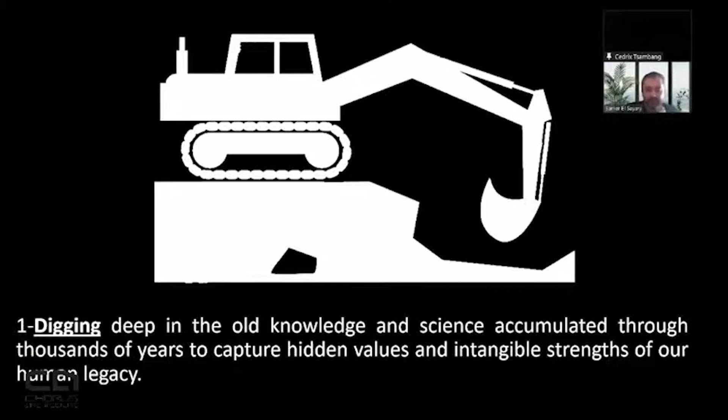Let me introduce my design manifesto, which I have developed over the last 20 years. First principle: digging deep into the old knowledge and science accumulated through thousands of years to capture hidden values and intangible strengths of our human legacy.

My second principle is developing those values and strengths using cutting-edge technologies to create state-of-the-art design that carries the spirit of the past, not in shape or form, but in existence. And of course, the last thing is documenting, publishing, and presenting those experiments to deliver them to the future generation.

I'll be presenting a set of projects. All of these projects are based on either existing technologies or near-future technologies.

We live here today. We have our biosphere that really carries us, enriches us. It provides us with nutrition, with oxygen, with everything that we are blessed with living in this place. But will this place be the same in the near future?

This is the most important and challenging question that we have to ask, and unfortunately maybe our future grandsons and future generations will have to answer it. Scientists have divided the existential risks, the mass extinction level events that might threaten our race and human existence, into 16 different divisions.

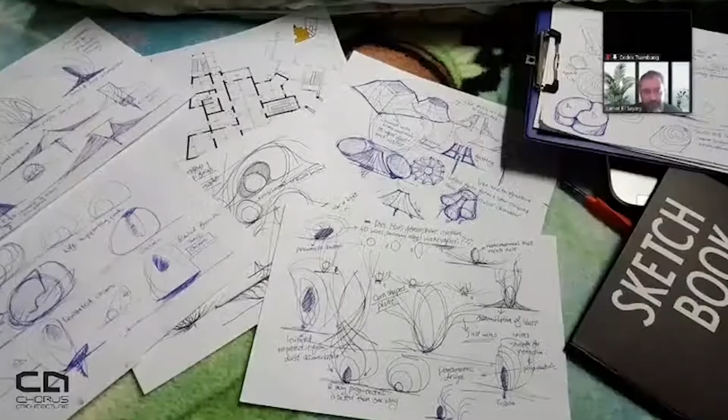And now the time for design. These are a set of projects; I'll be presenting 3 or 4 of them, but I always like to present their icons.

Let's first begin with my last project, presented this last summer, just 2 months ago. It was awarded, by the way. All of the projects presented today are internationally awarded projects, and this is merely something I would like to present.

It is a research project, so these are not only architectural projects. There is an architectural design inside this project, but the other part is a science paper that is produced and presented to different conferences and journals.

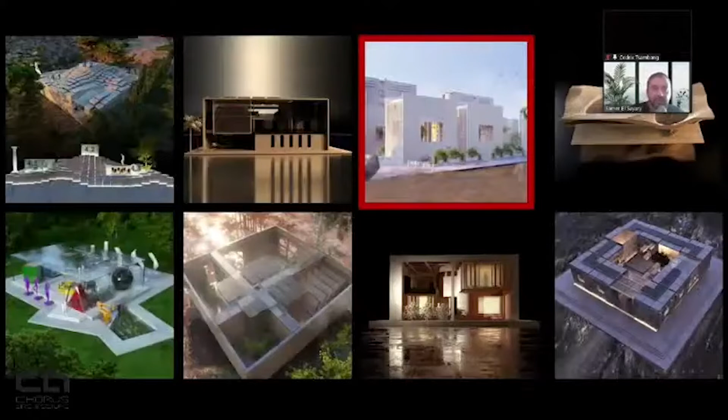So, Fina House - it is a kind of house. Fina in Arabic means the window or the courtyard, so it might also be called the courtyard, vertical courtyard house, or the window house. This project has a minimalistic view, and it was actually inspired by the Apple design code. There's a very interesting book that I started by reading.

It's called Designed by Apple in California. This book really describes the design code and the minimalistic approach, and how you can minimalize every single detail in your design.

But to reach this kind of simplicity, which was discussed and argued since the Renaissance era, even by Leonardo da Vinci in his famous quote, 'Simplicity is the ultimate sophistication,' doesn't mean that this is really a simple design. It means this is an ultra sophisticated design to reach this kind of minimalism.

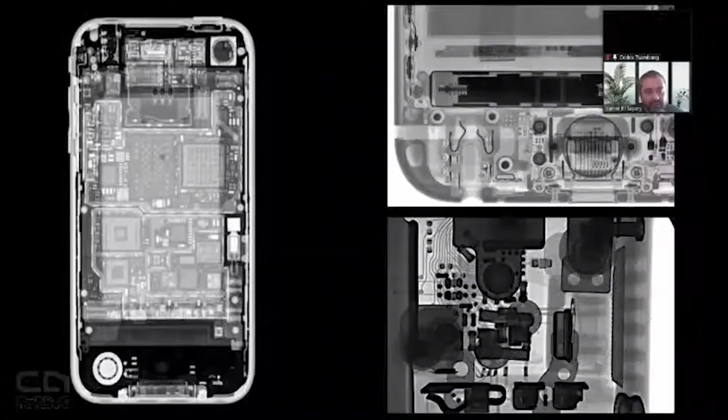So this outer shell that is really simple and minimalistic carries inside it the most sophisticated engineering design, developed using a lot of experts and teams, and maybe costing a lot of time, money and effort. This is one of the lessons we have learned from industrial design.

The same applies for this house. As it seems, it is minimalistic, it is so simple, it doesn't carry a lot of details as shown, but it was developed using 50 design criteria.

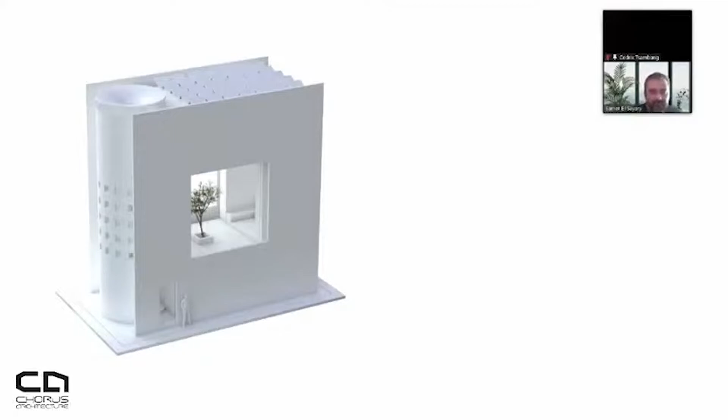Literally, 50 design criteria were developed and tested inside this house, categorized into developing our legacy, social core values, environmental agenda, clean water, economic sustainability, energy agenda, food production, urban regeneration, aesthetic value, physical and psychological well-being, flexibility, adaptability, zero waste, and biodiversity.

So these are the set of criteria that were developed, not only for this project but over the last 20 years, and were applied, all of them, inside the latest project. So this is about strategic thinking.

It is defined as a mental or thinking process applied by an individual in a context of achieving a goal, and that goal was to preserve Earth, to reverse climate change, and to decrease the levels of CO2 and carbon dioxide in our environment.

And that started by studying the context. That is the context I'm working on. This project was developed for this context.

This context suffers from severe poverty, and poverty is one of the United Nations sustainability goals, one of the 17 SDGs adopted by the United Nations. So it also has an economic and socio-economic agenda. These are also part of the same context, but this is maybe the better part of this context.

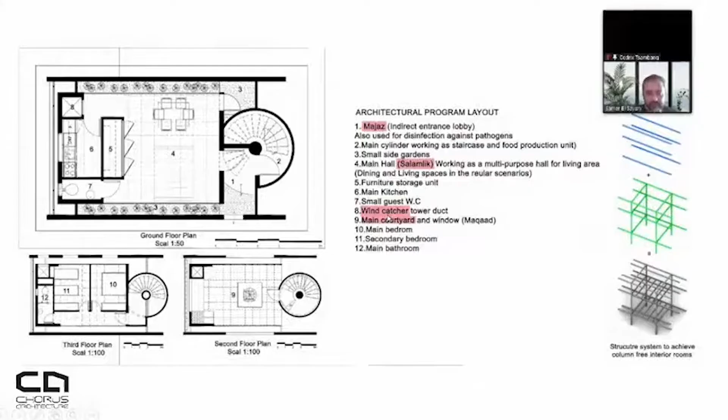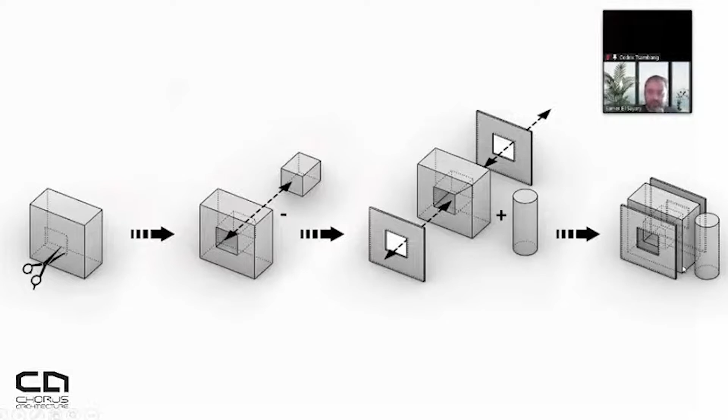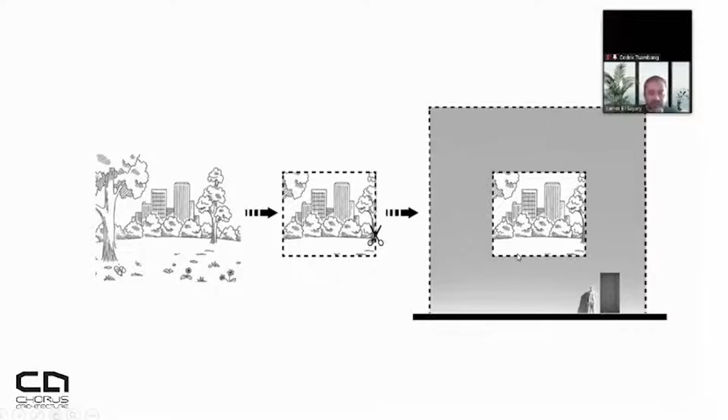Also, another aesthetical value is appreciating what we have today, our nature, part of our earth heritage, our legacy. By framing part of the nature and having this frame inside the house, it is part of the facade and part of our design to highlight Mother Earth and our nature, even our legacy of today.

And now comes the law of synergy. The law of synergy states that the whole is greater than the sum of its parts. And that law was used and utilized inside the design.

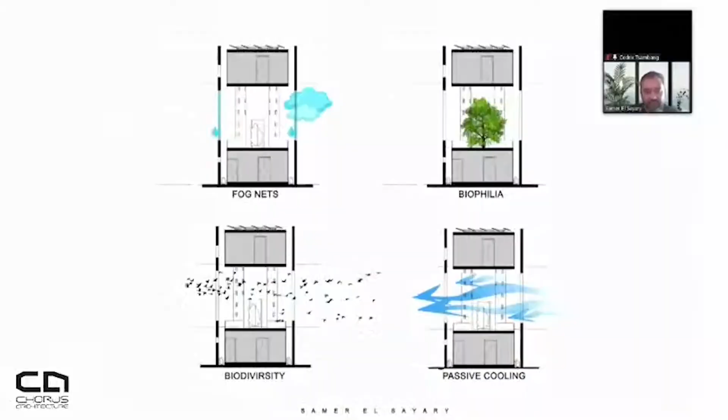So this vertical courtyard might seem like a simple vertical courtyard, but it will help in passive cooling by enabling the wind to penetrate the urban mass. We have a problem in today's architecture, even more so in dense areas.

This is called the urban heat, or mass urban heat. By having a void inside the solid mass, that enables the passage of wind through this urban setting, decreasing its degree and temperature.

Also, it allows and embraces biodiversity. It welcomes any kind of creature that might be passing. And of course, that will result in a biophilic design by adding more green elements.

With each house, you will have to plant a new tree, which neutralizes the carbon budget. With each building that is built sustainably, you also have to plant a tree as part of this design. So the tree is considered one of the vocabulary elements of the newly designed architectural house.

At early mornings, you have curtains that could be closed, acting as fog nets, contributing to collecting and harnessing some of the wasted water in this particular part of our earth. Even the fog net is a low technology.

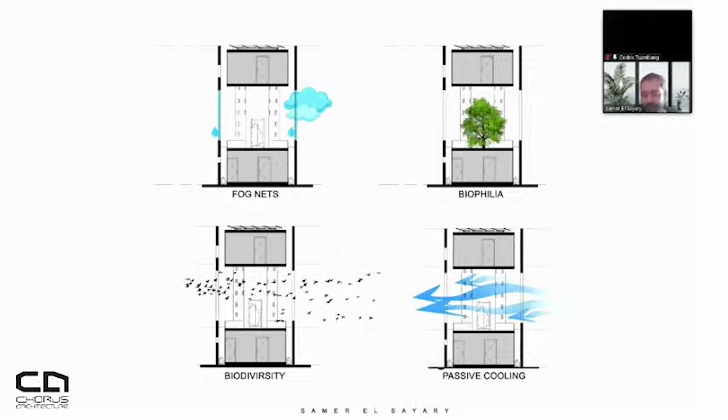This is a schematic conceptual diagram, and merely the quick calculations have resulted in 25 gallons of pure water per day inside your house that could be utilized in drinking, planting and watering the plants, or even in cleaning processes.

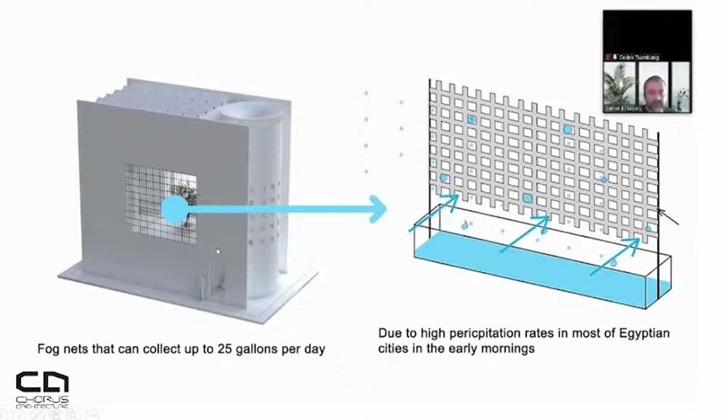Of course, given the individualism and cultural diversity in different regions of Egypt, we have to respect that people may not intervene in the offered design.

So I have offered solutions for the Nubian kingdom or Nubian societies in the modernized world in the south of Egypt, and even in the Sahara Desert, in the western African desert, where they used to build with a composite mixture of salt and sand from the local area of the oasis called Siwa. These are solutions that don't really affect the quality of the design, but merely add an added value.

Let's now break down and compose the Pigeon Tower, which is called the food production unit. It is composed of three main elements: it is a development of the old Pigeon Tower with a hydroponics unit, which will help in increasing the green and the planting.

Of course, the food, maybe like 31 to 32% of the needs of this family will be secured by the hydroponics inside it, and a stairs element, which is a vertical circulation element.

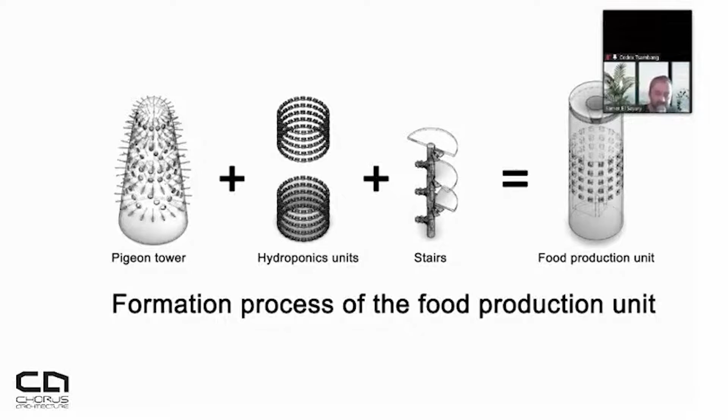And the last one, not mentioned here, there is a rainwater catcher which also gathers much of the dew and rain, filters it, and reproduces it to be used to plant and water the hydroponics unit with a system called aeroponics, which saves about 99% of water and is a very effective way to plant trees using water inside it.

And now comes technology. To be sure that this house will effectively work as designed and desired, simulation software was used to measure the degree of radiation and lighting, the diffused lighting inside the spaces, also eliminating the need to use any electrical lamps.

So at least you have from 8 up to 12 hours, or maybe 10 hours, of daylight entering the interior spaces. You will only need the low-cost, low-electricity LEDs at noon, in the afternoon, and in the evening.

That was based on a region called Fayoum. Of course, these data were input inside the software, and that is the resulting simulation.

Also, there is a wind catcher at the same tower. This wind catcher will be circulating clean and cool air, so it will decrease the need and eliminate the need for any kind of air conditioning system.

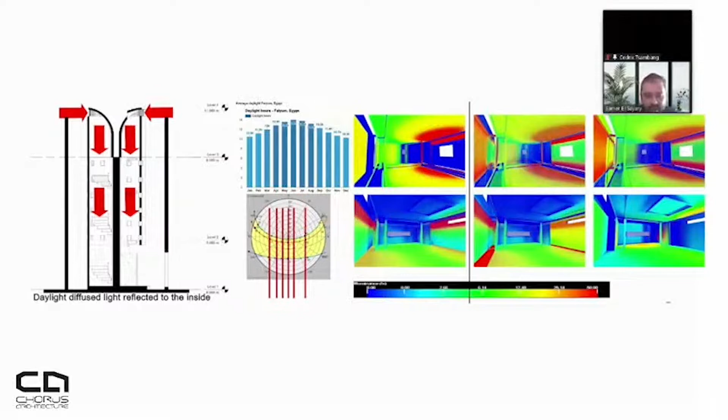So it is a multi-use architectural vocabulary that is used for food production, for water gathering, for cooling, and for lighting reflection. That is post-carbon architecture in my point of view—the kind of architecture that can use all the planet's renewable resources without any waste, without any emissions of carbon dioxide.

This is the conceptual basic design, not patented yet, but it is in the process of registering and documenting as a patent, for filtering the gathered water inside a vertical pipe that will be...

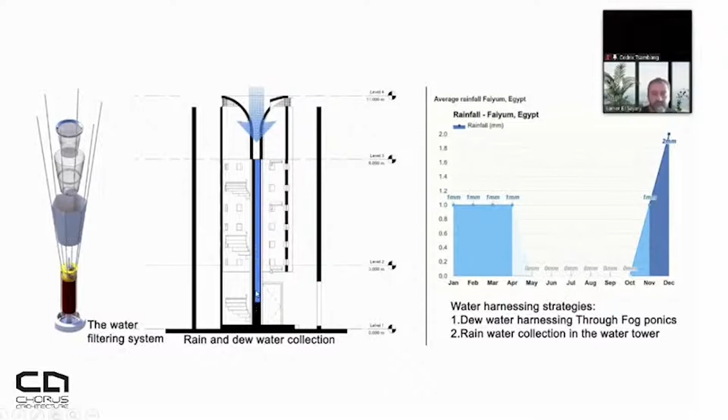And that leads us to the logical reasoning. Also, the logical reasoning is important—it is the ability to understand logical work through concepts and problems expressed in the form of images, i.e. the art part, the legacy, our human part, which we cannot also deny.

The house is not only a machine for living. It is a living organism that has to respond to our feelings, to our aspirations, to what we can see in the future. Responding to that agenda, some of the famous crafts of this area is the pop art.

The pop art is represented through the carpets, the rugs, even on the wall murals. It was analyzed, and the color palette, composed of these four main colors, was used as the lightscape at night time.

So it gives us our lightscape study, or a very nice painting of abstract pop art that really adds a new dimension, reminding the people of their roots, their legacy, their art that originated maybe hundreds and thousands of years ago, but in a contemporary dress.

Another engineering principle that was also used was composability in design. It is a system design principle that provides components that can be selected and assembled in various combinations, which leads us to flexibility in design.

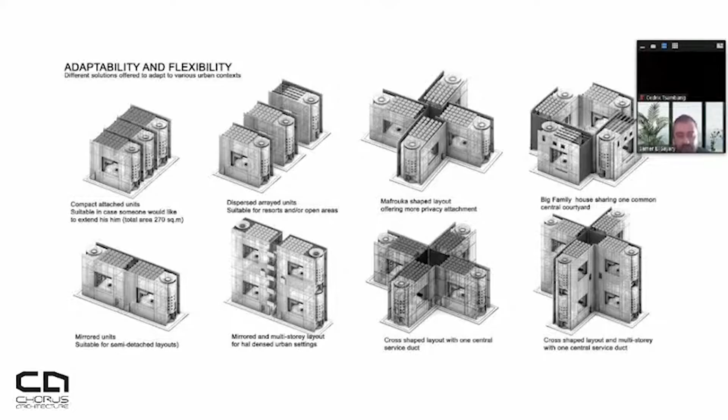The scientific thinking also is an important part of shaping and reformulating this kind of design. So even after the project is finished and it was delivered and received its award, that doesn't mean that the project cycle is ended as a design.

It is important to complete. So some of the projects presented today last for 10 years, maybe 11 years, and maybe more. This is because it is a developed kind of house, so there are generations of this design.

So this is the last generation in a line of houses that I'm presenting today, and also, in the future, this design will be the laying foundation for other designs to come.

Also here, using the latest CFD, or computational fluid dynamics, to study the pressure and the wind behavior responding to this kind of form.

Maybe it needs a little bigger window. Maybe it needs a little bit wider double skin values. So it is important to test it and study it so we can respond to future development.

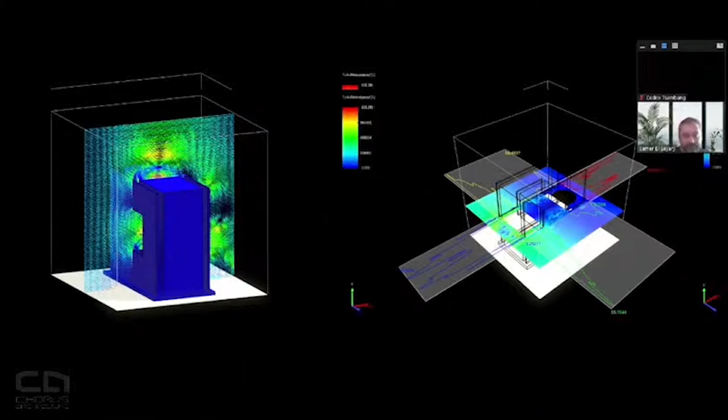These are just diagrams of the wind simulation done in various scenarios, and it takes really a lot of effort and powerful computers to do this kind of simulation, but it is crucial and important in order to develop it and present it to our future generation. This is the legacy that we will be leaving for our grandsons and children.

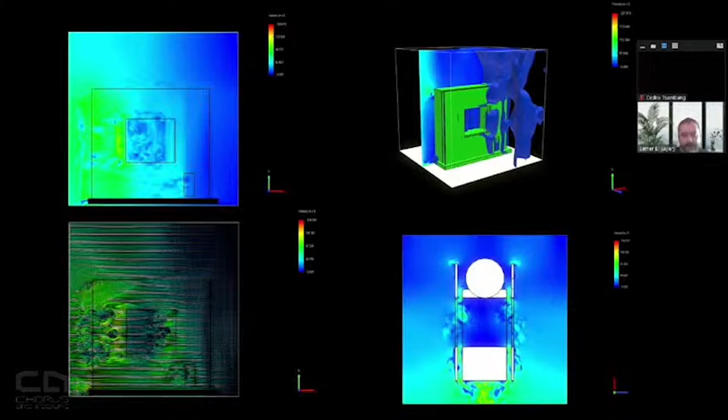The first project is ended.

I would gladly present very briefly the second house. We can say in a funny way that the last house, the white minimal house, is the son of this house. So this house, Bayet Al Suhaymi, the one that I'll be presenting, was the father, the grandfather of all of this research line that I am presenting today.

It started in 2011, just 10 years ago, and it is still a work in progress. It is a never-ending kind of project because it is a scientifically and architecturally project. So that is Bayet Al Suhaymi, first designed in 2011.

It was awarded 3 times at the MedCOP 21 in Marseille and Paris, again with the first award at Medibat, the scientific forum in Tunisia in Sfax, I think in 2012, and at the Hassan Fathy Award in Egypt in 2011. So it was awarded mainly 3 times, and this project was published in 5 different languages.

This project is a new approach, a redesigning. And the funny part, the very funny story for this project, is that it is exactly the same project that was designed 500 years ago, in the medieval era, in the old ancient Egyptian capital Cairo, where there was someone called Al-Suhaimi.

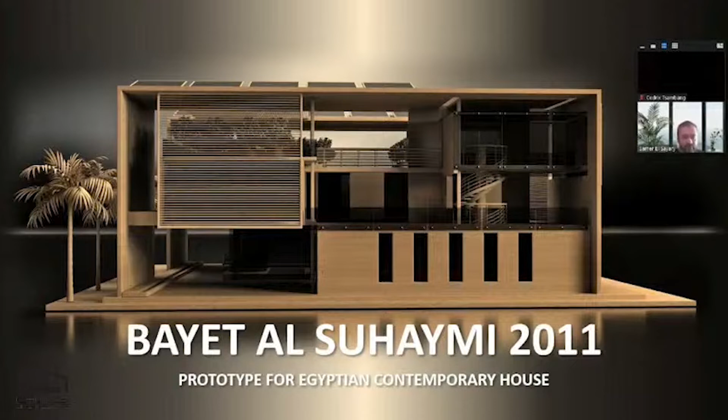He was the prime minister, the biggest and largest minister of trade at that time, and he built his own house. It was called Bayet Al Suhaymi, built in the 1500s, the 16th century or the 15th century, as I recall. That is the original Bayet Al Suhaymi.

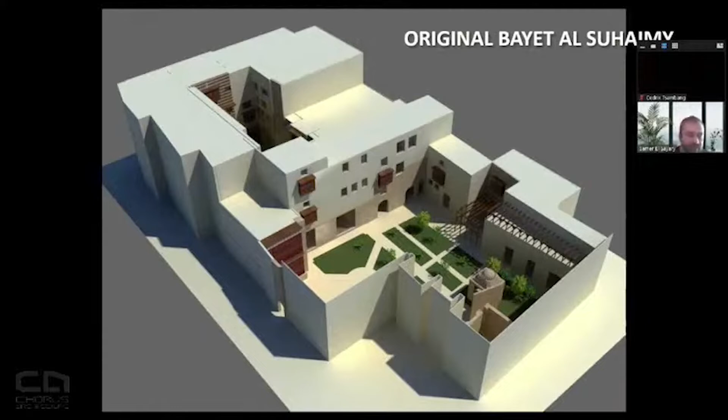Of course, today it is open for tourists, so you can see a house aged 500 years. But the really interesting part is that after studying this house through my PhD and through scientific research, I extracted all of the values - social, economical, environmental - that were designed into this house, and gathered all of those values inside.

Of course, this is also a study of the interior spaces. There is even a virtual reality experience to understand and live in this house, maybe for days, to test the user experience of the house.

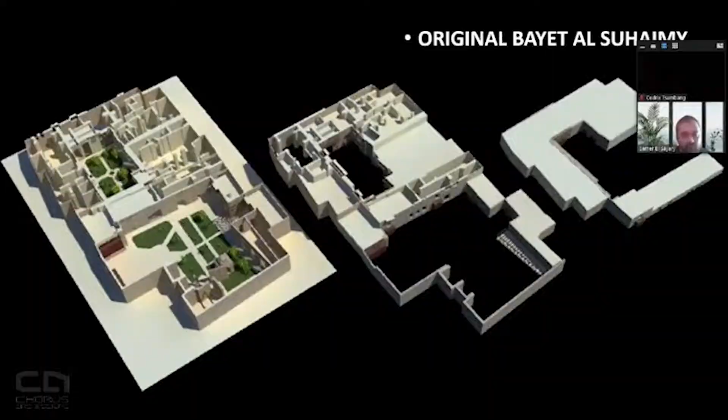All of those values were interpreted in this building, but using today's technology, today's concepts, today's ideas - zero carbon, zero energy, extreme sustainability, water generation, and positive energy production. So it is something like a blend between the past and the modern day.

There is a visual reading of the architecture program from the facade, but also privacy is preserved by having all of the bedrooms at the inner part, while the outer part is more the family living areas, with screens that reflect sunlight inside without direct sunlight, only diffused sunlight. This decreases the need for air conditioning while enabling natural daylight to enter the spaces, also eliminating the need for any kind of lamps.

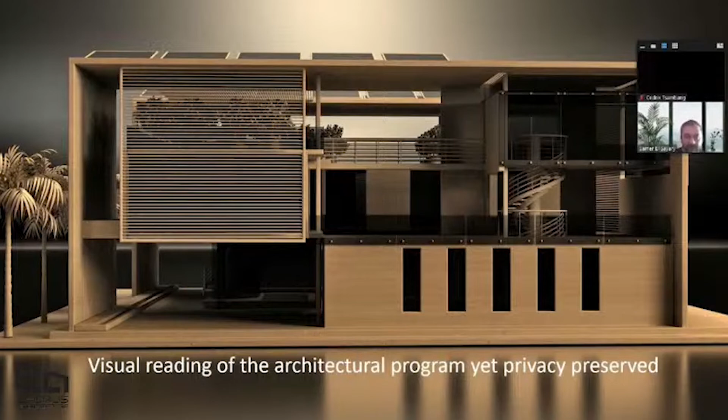It is also about creating social spaces for intergenerational interaction. Three generations of the same family can live in this house thanks to very well studied interior spaces that fulfill the needs of the grandfather, the father, and the son - three generations living on three different stories of the house.

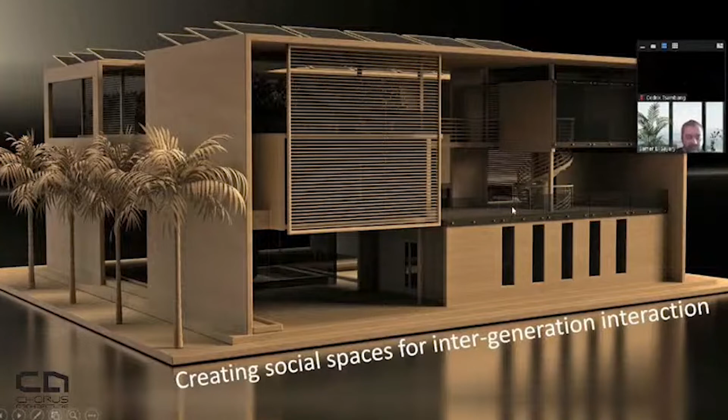Also, it can absorb any kind of new needs. There are intentionally left spaces for new rooms that could be added in the future, fulfilling the expanding needs of the same family. Visual connectivity is established through open plans and terraces.

Louvers mimicking the old mashrabiya - a very ancient and old vocabulary used in ancient Egyptian architecture in the Islamic era. This was the top technology at that time, and it also needs to be studied and developed today.

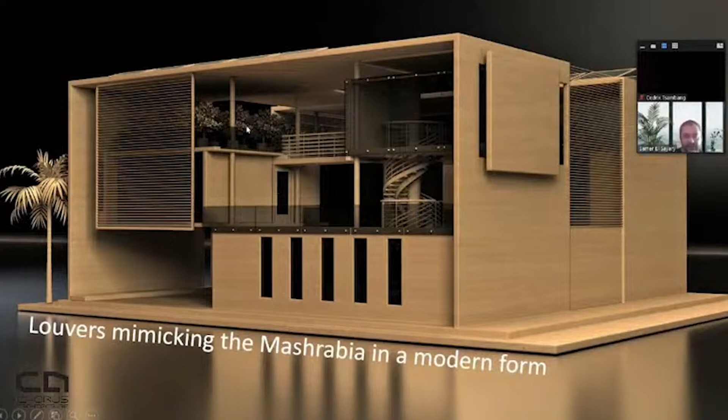You can find here even glimpses of a food production unit at the top roof of the building. This is not hydroponics - this was 10 years ago, maybe before the emergence and normalizing of that concept. So it is a roof garden of vegetables and fruits that could provide the family with about a quarter of its needs with clean, chemical-free produce.

Of course, the dispersed masses allow air to pass through. So this particular room, for example, will have wind from above and below, keeping it cooled throughout the whole day. We believe there is no need for any kind of air conditioning system, and this is a kind of luxury, modern, contemporary lifestyle.

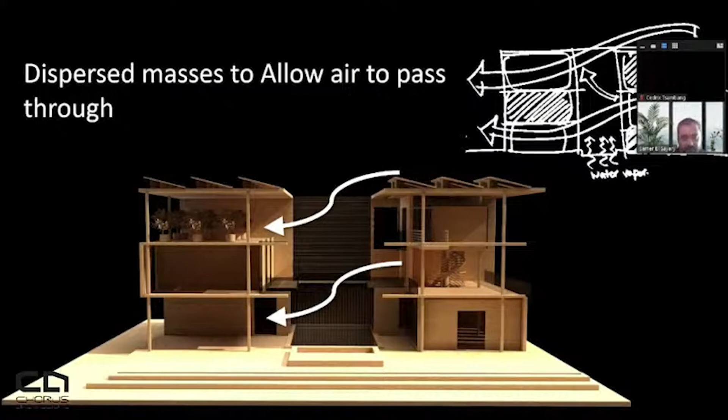Also, we have the inner court, which is equipped with a water pool. This helps in passive cooling. The wind discussed in the last slide will be intercepted by this water vapor, and the water vapor and wind will result in passive cooling for the whole building.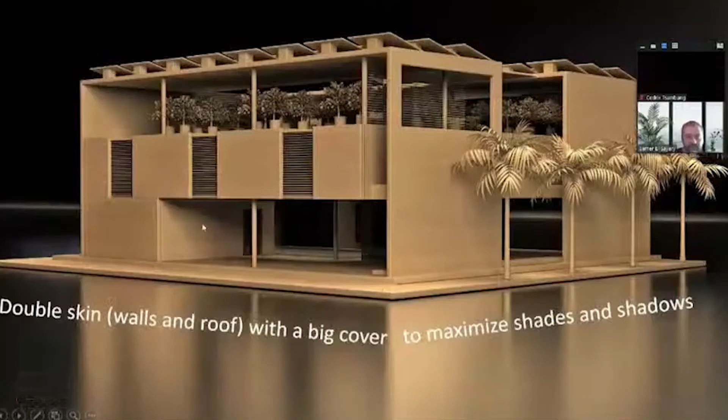Also, the double skin was equipped here, double skin walls on a roof with a big cover to maximize the shades and shadows. This is a very interesting part of the architecture. We are not only designing form or a plan, we are designing shades and shadows. These are part of the design criteria taken into consideration while developing this house.

Upon the initial calculations, it needed 39 photovoltaic cells or sheets to generate about 10 kilowatts of daily consumption for a family house. This is designed in a different part from the last house. The last house needed only 35 solar panels, but this one needs 39. It differs from region to region.

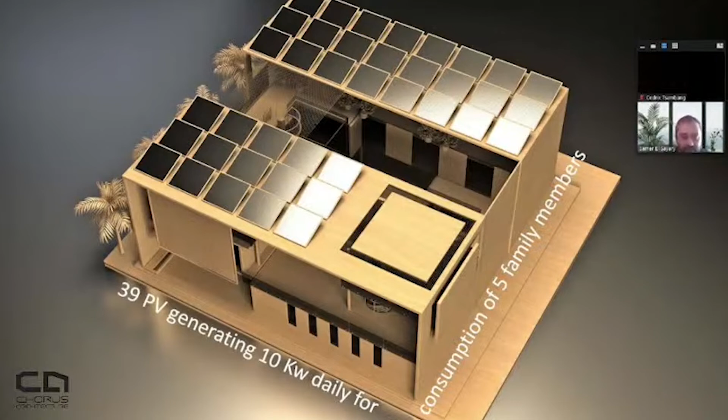And science should come at the end. Also, the CFD, or computational fluid dynamics — this is a more primitive software because it was available 10 years ago, that was the available technology at that time. But it was conducted and it succeeded in all tests.

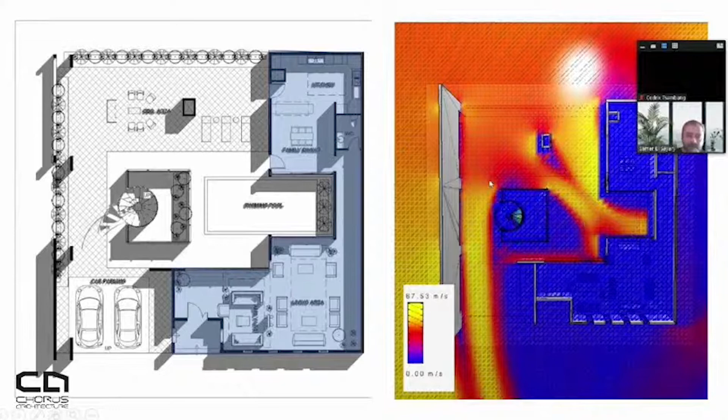You can find here there is a high maximum velocity of the wind, but this is a closed part. So how is the wind here with a very high velocity inside a closed courtyard? This is because the wind, even if it goes in from below, from the ground level, it will pass by and come out from the first level, passing through 2 stories.

And this is the wind rose of the region that was designed, as part of the studies. The 3 floors were tested to ensure there will be flowing air breeze all during the year.

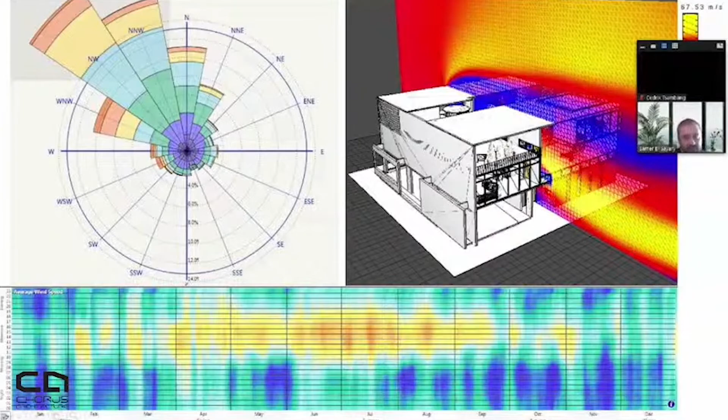This experiment resulted in other experiments even beyond our African and Middle East region, in Arizona, in the United States. That was also approved and was awarded. The same design principles were used in the Arizona house.

We have a double facade kind of house, with an outer and inner layer. And of course this is a mansion, not a small family house — it's a great mansion with multiple rooms.

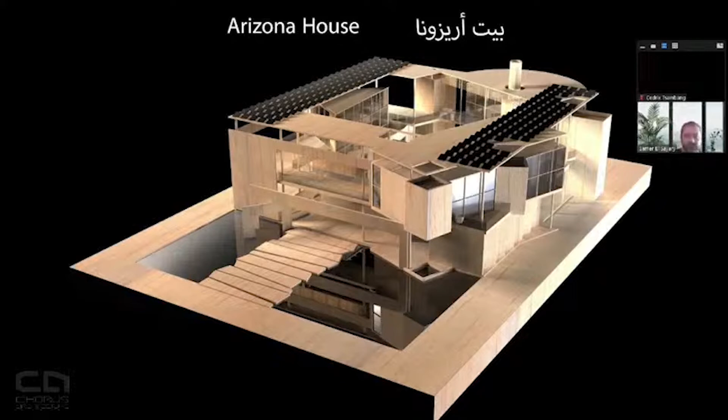You can easily find that the number of solar panels is much bigger than ever. But also you can find a lot of wind catchers, wind towers — this is number 1, this is number 2, number 3 — three different wind towers utilized across all the spaces. You can also find, for cold winter nights, a biogas reactor that might provide heat, and at the same time some of the fuel used for heating at the winter nights.

Now, let's switch to future vision, future houses. Let me make a small comment: all of the future architecture presented today is built upon existing technology. So this is not science fiction, it is science reality.

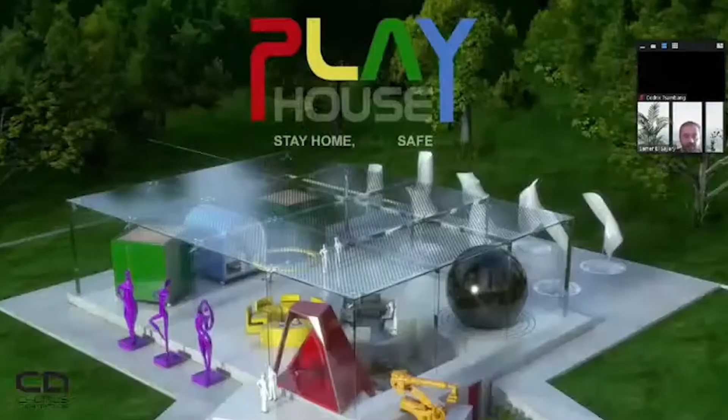The playhouse is a house designed for Germany, to be put in the German context. This is a house — this is not glass, by the way, and I usually like to make this comment — this is transparent aluminum. It is a composed material called aluminum oxynitride.

This kind of material does exist, but the main problem for today's invention is that it is so costly — 1 square meter costs about $20,000. It might not be very feasible for today's architecture, but we believe that in the next 10 to 15 years maximum, it will be an available material with an available budget for anyone who would like to use it.

So this kind of skin is totally recyclable. This is some kind of aluminum, so you can recycle it after the life cycle of the building. It is a highly durable kind of metal building, but with very low conductivity, so it will not transfer heat, but it will capture the light and the natural views of this context.

So actually you are living inside the forest, living inside nature with a 100% totally secure and safe kind of house. And another research that I used from MIT is having the transparent kind of dots.

This transparent dotted roof is the new generation of solar panels, so also this is another zero energy house. Also you can find here these 10 pieces of sails, moved by the wind, also generating energy, because in the German context you cannot only depend on solar panels, we also need wind power to generate energy. So by using something called the piezoelectric effect, it also generates energy.

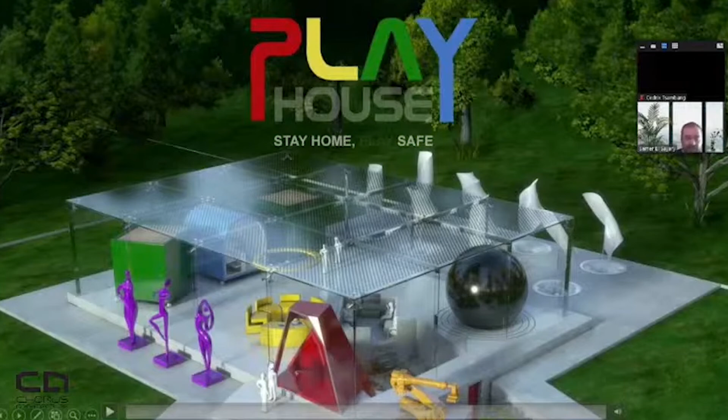By the way, the entrance is also equipped with sanitizers that make like a quick shower for anyone entering the house, to make sure they will be entering virus free as possible. This is the transparent aluminum - these are real samples that were designed and studied.

This is the development process of the house, how it will be opened. By the way, these are lighting lines also, with a very low cost electrical consumption budget. Also we do believe that this is a zero energy house that will not only be zero energy, but could produce energy that exceeds its needs for the surrounding areas.

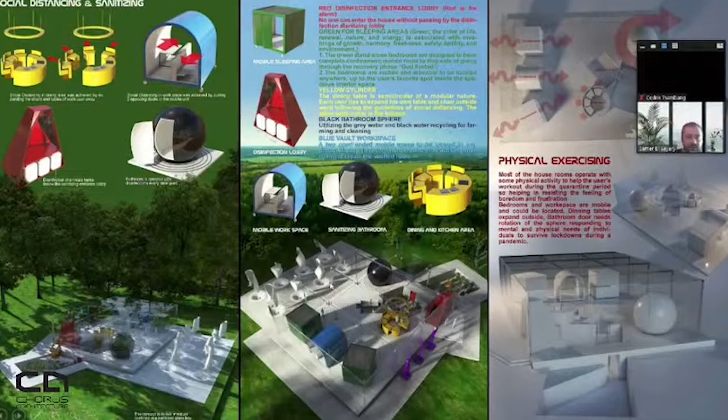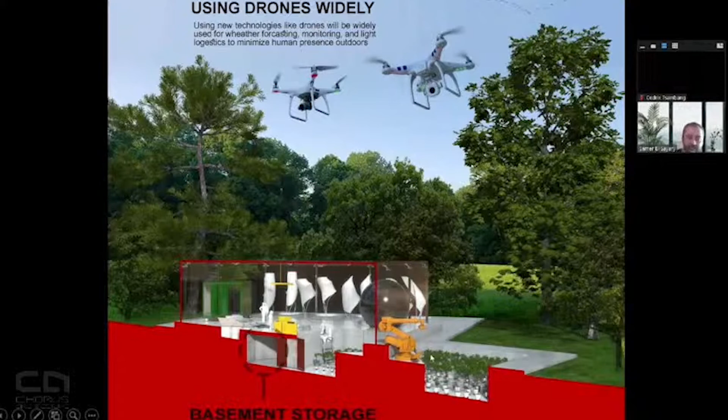Also, to eliminate the need for people to go outside and consume, it is also equipped with drones. So this house is a smart kind of house, an intelligent kind of house. It will use a robot arm for maintenance, cultivation and farming, and drones for weather prediction and for any requirements that need to be bought from nearby supermarkets or pharmacies or whatever you'd like. You can just send your drone, so you don't need to go yourself, saving human lives.

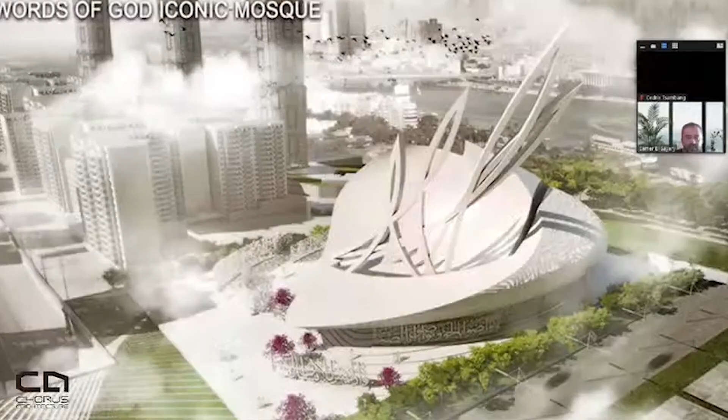Switching from residential to public buildings, this was a mosque designed for Dubai, a 2018 competition. Without entering into a lot of details about this mosque, the interesting part is that we used a zero energy approach in this design, and at the same time it also reflects the degree of faith of the worshippers worshipping inside this mosque.

So all of the ground floor is designed with the piezoelectric effect. Once you just pass or press with your feet on this floor, it generates energy. So the more worshippers that enter this temple, the more energy that will be conducted, and hence more lighting these trees will be lit. So the more worshippers and people entering this temple, the more light, and that reflects the degree of faith in this society, and at the same time without using any extra energy.

So people will be encouraged. People will be inviting each other: please come to this temple so we can all help increase the energy rate inside this building and light those trees.

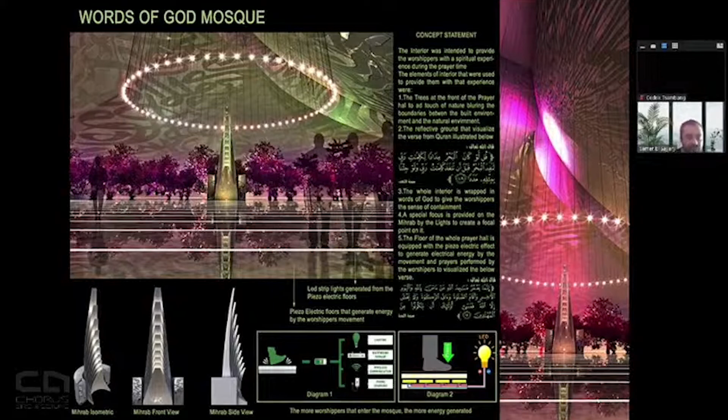And the last project for today is Guggenheim, the clouds. It is a project that was done in Helsinki, Finland, in 2014. It is also another project that utilizes nanocarbon technology in carbon tubes.